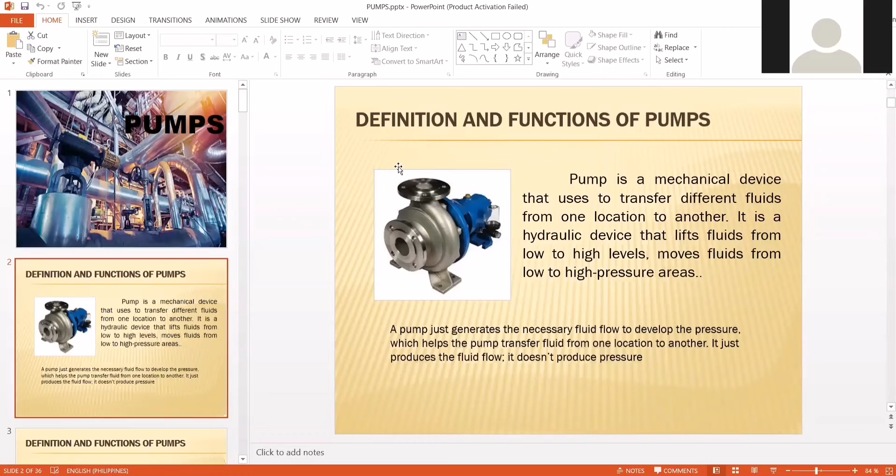It serves as a mediator to transfer fluid from a particular location to another location. It is self-explanatory. Pumps are mainly used for pumping water, slurries, food,

wastewater, oil, and gas. Pumps are also used for irrigation systems, power plants, wastewater treatment systems, chemical industries, food industries, fertilizer industries, and etc.

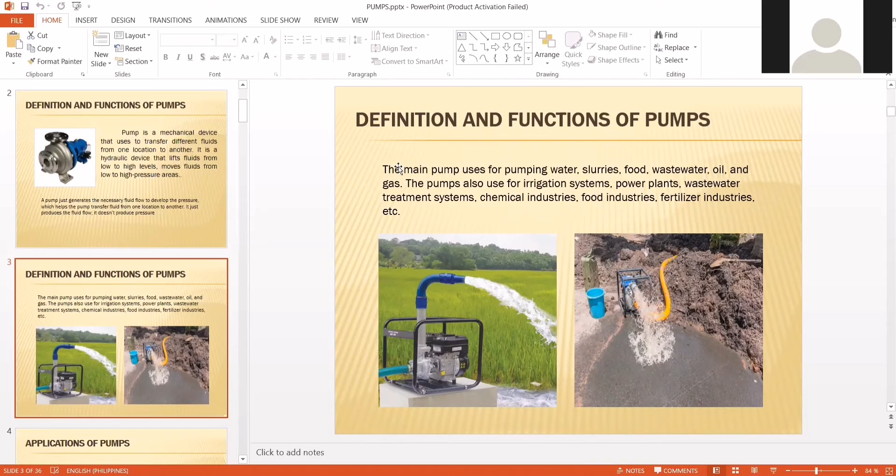Number one, pumps are used to transmit water from one place to another place. As I said earlier, you get a source of water from a lower level, so for the water to reach the upper level where you want to send it, you really need a pump.

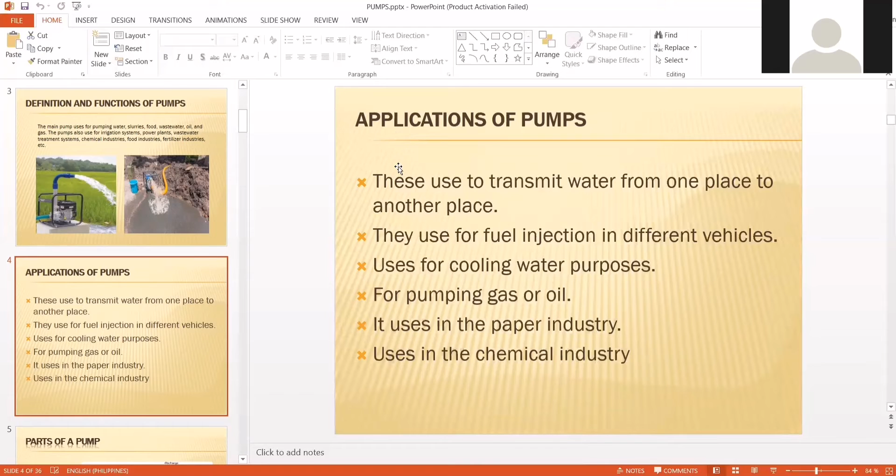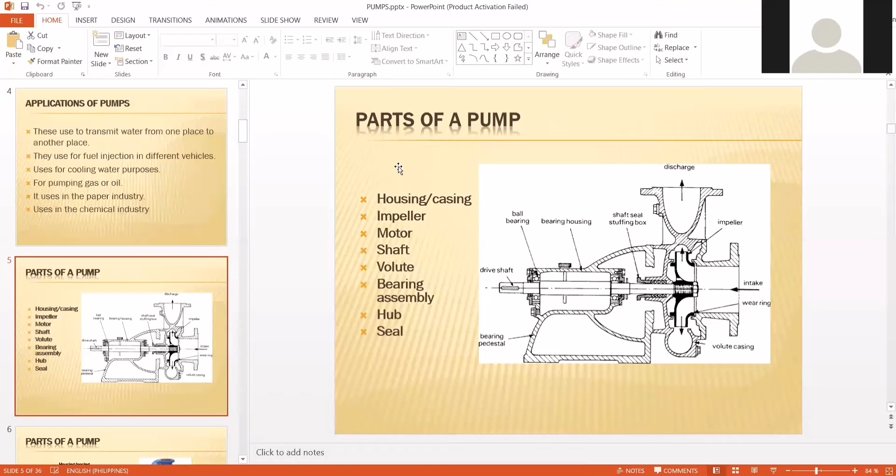So what are the parts of a pump? As you can see in the image provided, that is an example of a pump labeled with its different parts. We have housing or casing, the impeller, motor, the shaft or drive shaft, the volute, the bearing assembly, hub, and seal.

Housing or casing: the housing or casing is the outer shell of the pump that protects most of the components from outside elements. The casing of the pump should be made of materials suitable to withstand the environmental conditions of the application. For example, a submersible pump should be water and rust corrosion resistant. So obviously, the housing casing should survive in whatever environment you put it in.

Next is the impeller. It is a rotating disc with a set of vanes coupled to a shaft. When the impeller rotates, it imparts energy to the fluid to induce flow. Flow characteristics of the pump vary widely based on the impeller design.

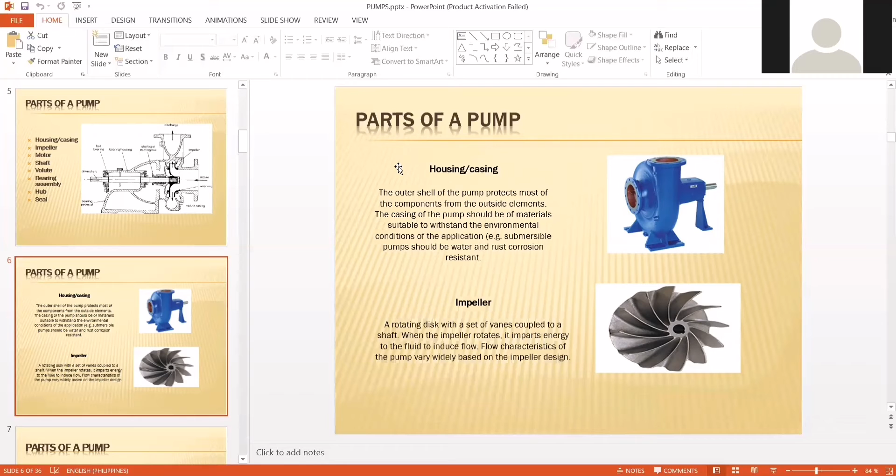Next is the motor. The motor is the power source of the pump, drives the shaft. AC alternating current motors and direct current motors are the most common power sources of pumps, but internal combustion engines (ICEs), hydraulic power, and steam power are other possibilities. Usually, the motor that powers the pump, the mediator, is an AC or DC motor, but for larger pumps, it's probably hydraulic power or steam power.

Next is the shaft. The shaft connects the impeller to the motor or engine that provides power for the pump. The shaft and its support arrangements must maintain alignment of the rotor within its running clearances and through the shaft seal.

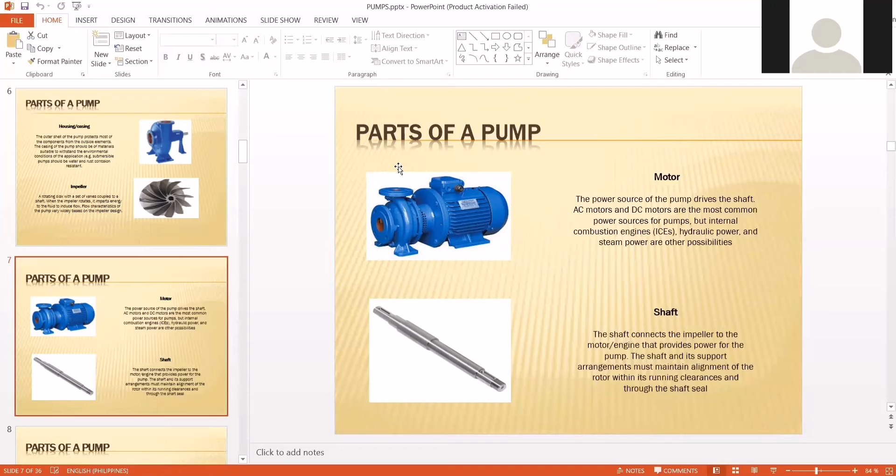Volute: the volute is the inner casing that contains the impeller and collects, discharges, and sometimes recirculates the fluid being pumped. The materials used to construct the lining of the pump volute must be compatible with the handled media.

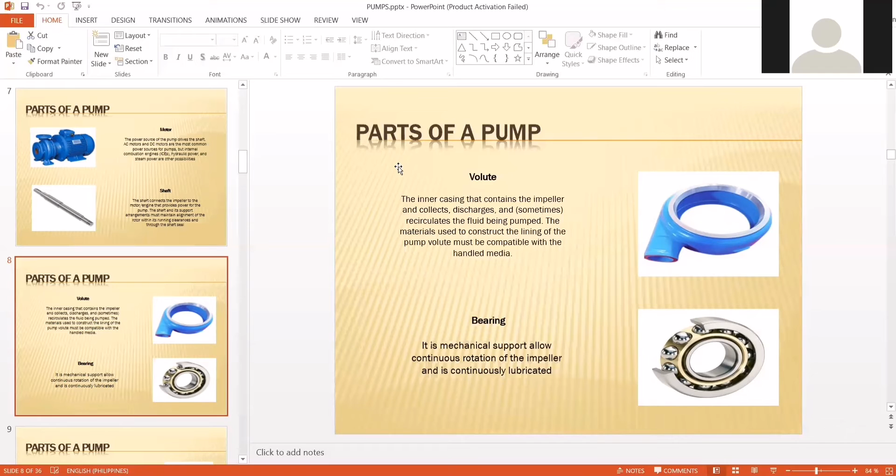Next is the hub. A hub is a device attached to the bearing assembly, which is the connecting point for the motor or engine. The seal protects the bearing from being contaminated by the pump media. Some pump designs are sealless, meaning the pumping mechanism is completely contained within a pressurized volute chamber with static seals. So you need seals to secure your pumps.

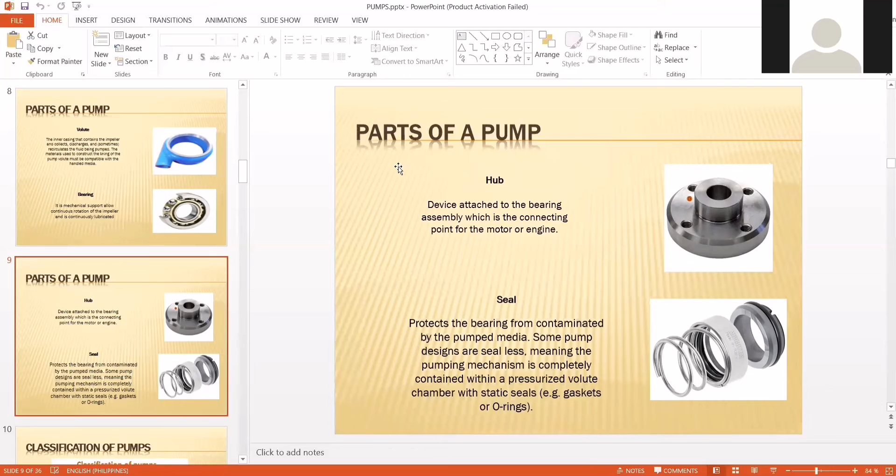Now we move on to the classification of pumps. There are two major types of classification. First is dynamic pumps. Dynamic pumps impart velocity and pressure to the fluid as it moves past or through the pump impeller, and subsequently convert some of that velocity into additional pressure. It is also called a kinetic pump. Kinetic pumps are subdivided into two major groups: centrifugal pumps and vertical pumps.

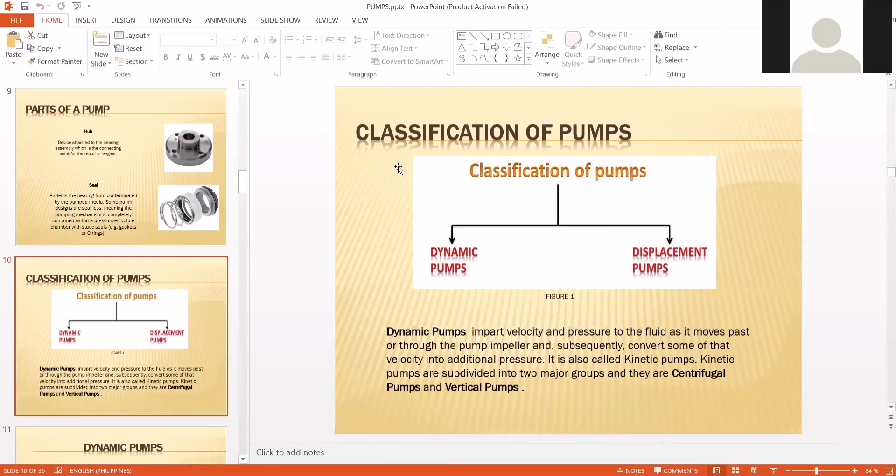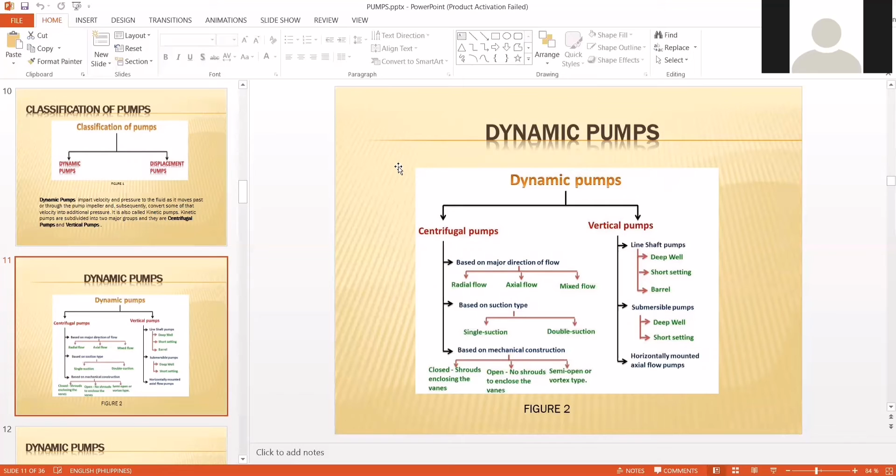This figure shows the different subtypes of dynamic pumps, so centrifugal pumps. What is a centrifugal pump? A centrifugal pump is a rotating machine in which flow and pressure are generated dynamically. The energy changes occur by virtue of two main parts of the pump: the impeller and the volute or casing.

So as we can see in the picture, the impeller and then the volute. The function of the casing is to collect the liquid discharged by the impeller and to convert some of the kinetic energy into pressure energy. So it's more that the movement of the water produces pressure, as if it's converted coming from the impeller.

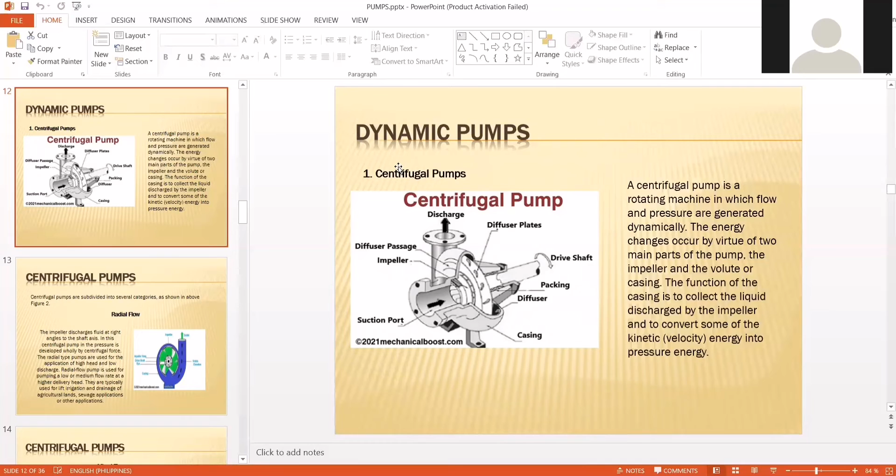Centrifugal pumps are subdivided into several categories. As we can see here in figure 2, we have three subtypes of centrifugal pumps. The first is the radial flow.

Radial flow is when the impeller discharges fluid at right angles to the shaft axis. In this centrifugal pump, the pressure is developed wholly by centrifugal force. The radial type pumps are used for applications of high head and low discharge, pumping a low or medium flow rate at a higher delivery head. They are typically used for lift, irrigation, and drainage of agricultural lands, sewage applications, or other applications.

So from the word centrifugal, radial means circular path. It also uses applications of high head and low discharge. So the mechanics of the radial flow pump is that the head is large when water enters the impeller, then there's high pressure, low discharge, meaning the pressure is strong. As shown here on the right side of the photo, the outlet is a bit smaller than the inlet at the suction. So that is the type of pump with high head and low discharge.

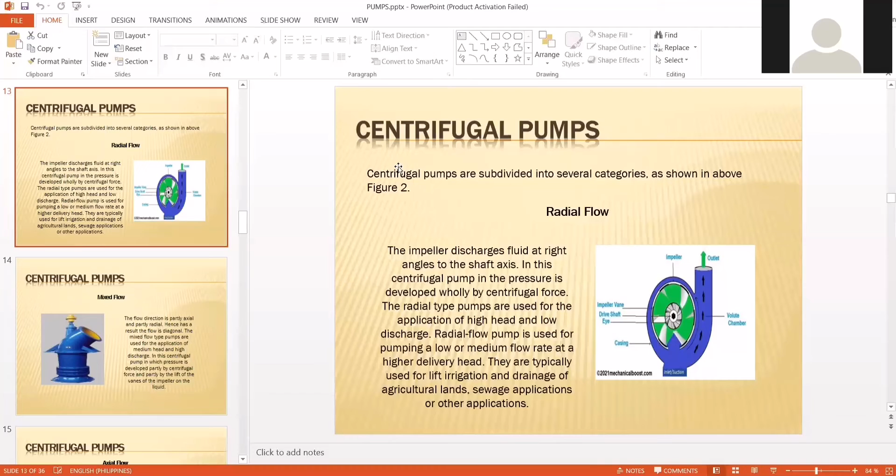Next is mixed flow. The mixed flow direction is partly axial and partly radial. That's why it's called mixed, because it mixes two types of flow. As a result, the flow is diagonal. The mixed flow type pumps are used for applications of medium head and high discharge. In this centrifugal pump, pressure is developed partly by centrifugal force and partly by the lift of the vanes of the impeller on the liquid.

So here it's both combined. There are two kinds of pressure being developed: one from the centrifugal force, and one from the vanes of the impeller.

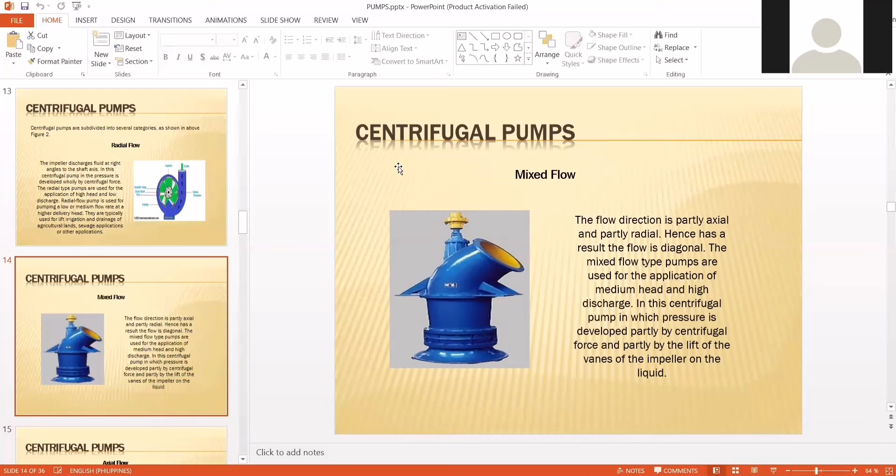So that's mixed flow. Next is the axial flow. Axial flow is when the flow through the impeller is parallel to the shaft axis, with low head and very high discharge. So it's the opposite of the radial flow. The axial flow type pumps are used for applications of low head and high discharge. In this centrifugal pump, the pressure is developed by the propelling or lifting action of the vanes of the impeller on the liquid.

So we have a series of nomenclature. Specific speed NS 500 to 5,000, and it should be greater than 1.5 — that is the radial flow pump. For a specific speed of 5,000 to 10,000, it should be less than 1.5 — that's for the mixed flow pump. For the axial flow pump, the specific speed is 10,000 to 15,000, and it should be equal to 1. So I guess this is the ratio.

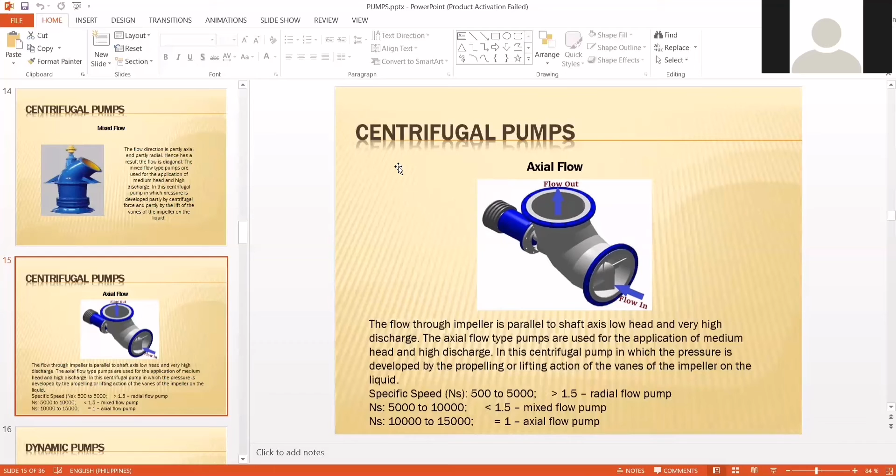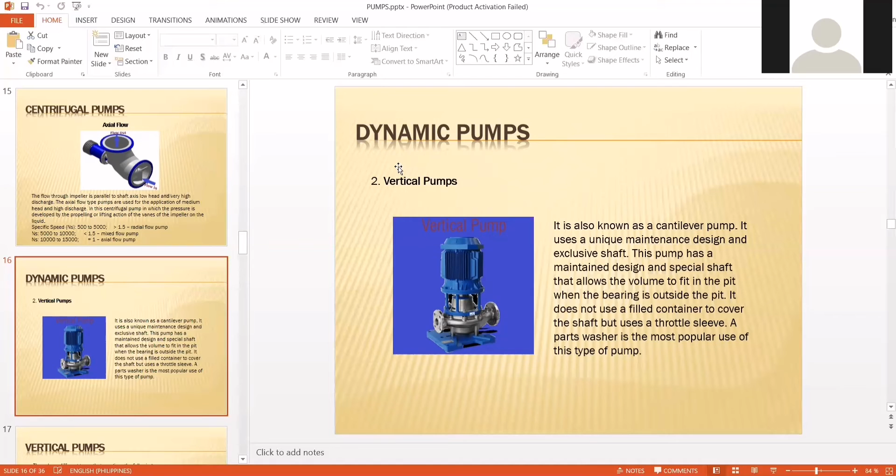Vertical pumps have different types. The first is the horizontal pump. The horizontal water pump has at least two impellers and is used for pumping service. All phases are in similar shelters and mounted on similar axes. At least 8 additional stages can be mounted on a single horizontal shaft, each lifting roughly the same amount of head. The multi-stage water pump can be primed, double or single suction with the first impeller. That is an example of a horizontal pump.

Next is the submersible pump. These are close-coupled pumps driven by submersible motors and designed to be installed underwater in damp wells. The motor mounts under the bowl assembly and directly connects to the rotor shaft of the pump.

A submersible pump is also known as a septic tank, sewage, and rainwater pump. It has many applications including construction, municipal, industrial, local, household, commercial, and stormwater recycling services.

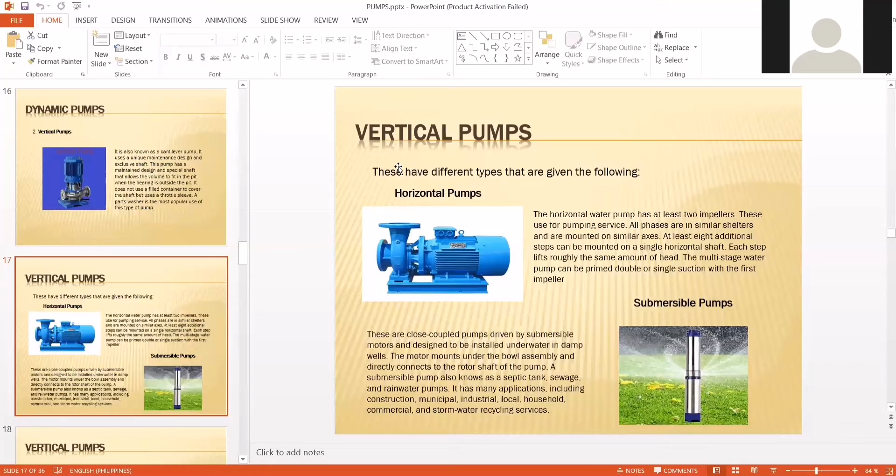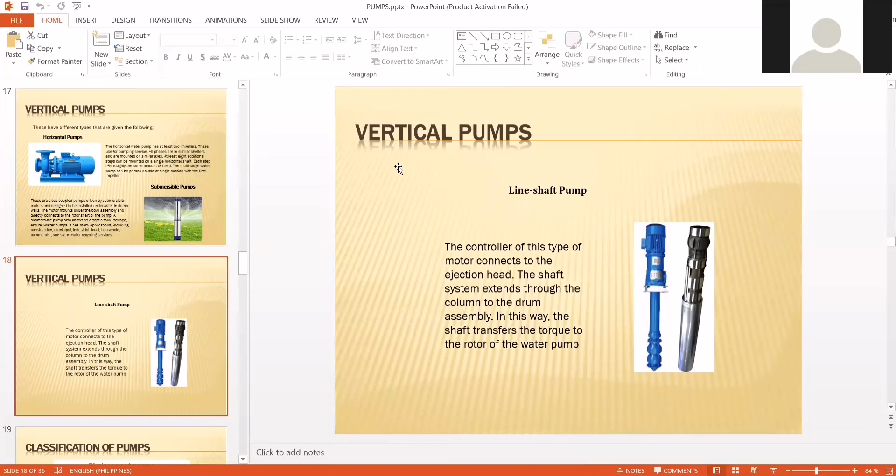Now I am going to hand over to our next reporter for the second type of classification of pump.

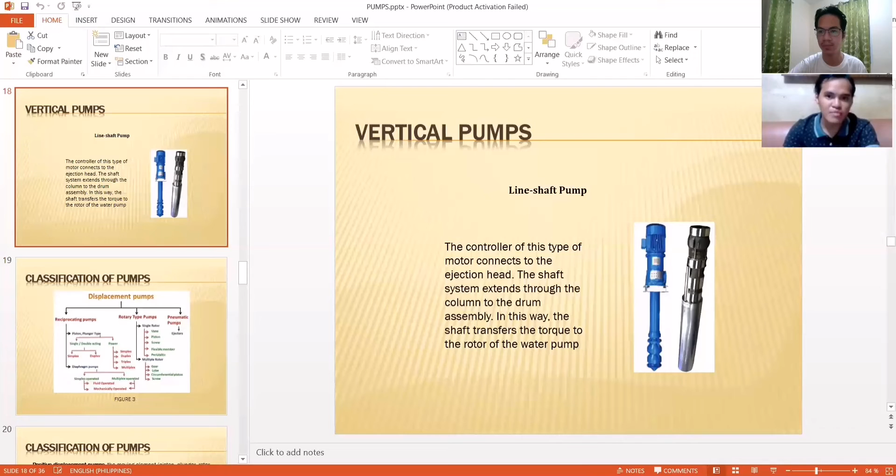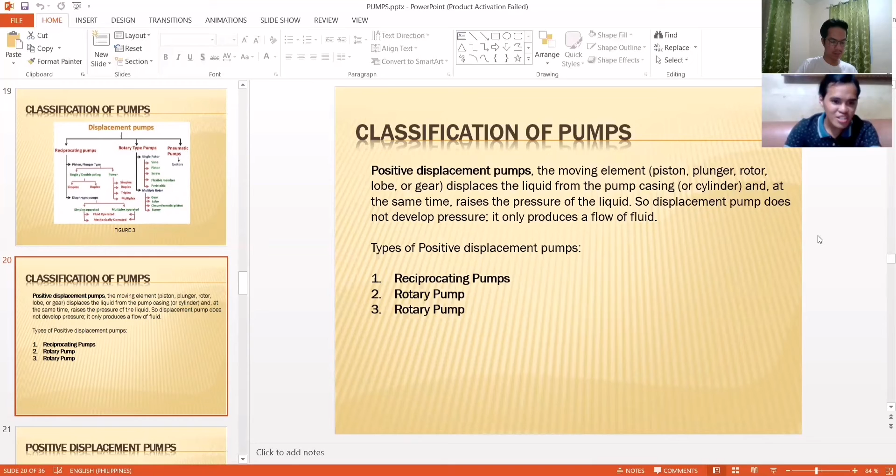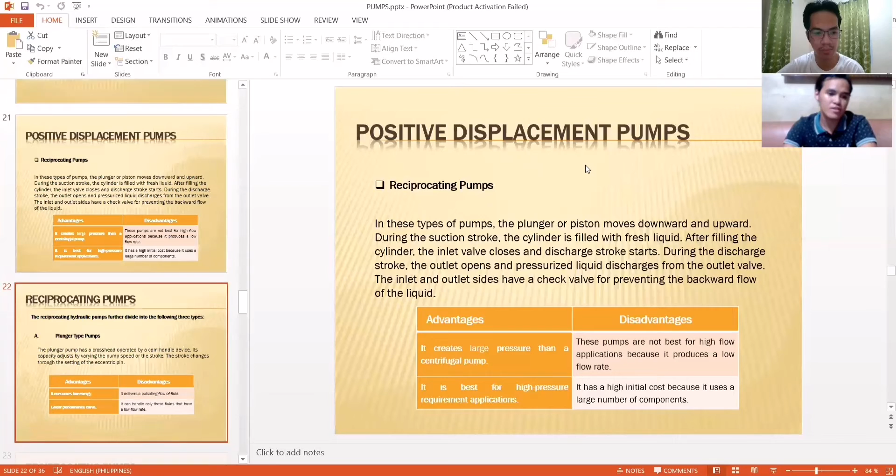Next slide. The reciprocating hydraulic pumps further divide into the following three types.

First is the plunger type pump. The plunger pump has a crosshead operated by a cam-handled device. Its capacity adjusts by varying the pump speed or the stroke. The stroke changes through the setting of the eccentric pin.

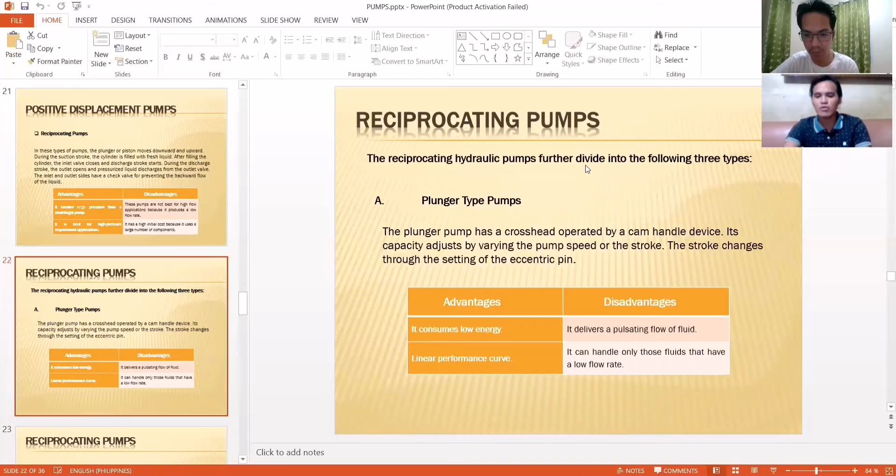The advantage of plunger type pumps is that it consumes low energy and has a linear performance curve. The disadvantage is that it delivers a pulsating flow of fluid, and it can handle only those fluids that have a low flow rate.

The second type of reciprocating pump is the diaphragm pump. This type of pump is versatile and can handle a large number of fluids, including dry food powders, wastewater, additives, pharmaceuticals, and chemicals. The advantage of diaphragm pumps is that it does not require any packing or seals, so it is used in applications that do not require leaking. It is designed for pumping slurries and liquids.

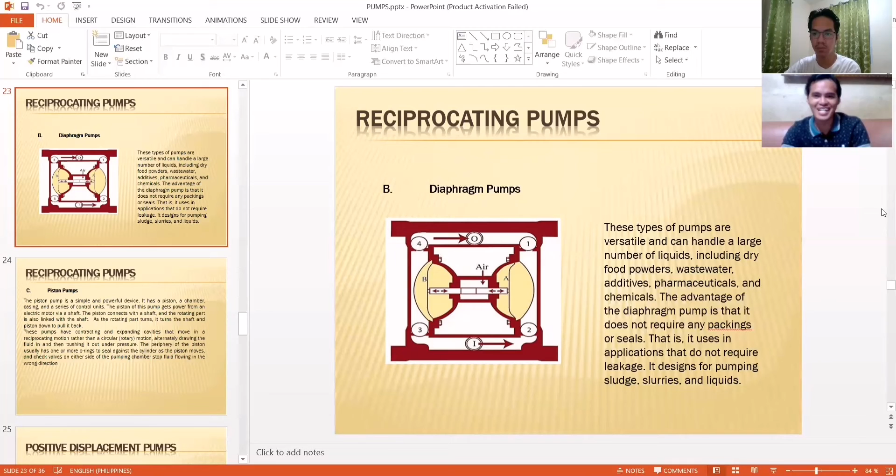Next is piston pumps. The piston pump is a simple and powerful device. It has a piston, a chamber, casing, and a series of control units.

The piston of this pump gets power from an electric motor via a shaft. The piston connects to the shaft, and the rotating part is also linked with the shaft. As the rotating part turns, it turns the shaft and the piston down to pull it back. These pumps have contracting and expanding cavities that move in a reciprocating motion rather than a circular or rotary motion.

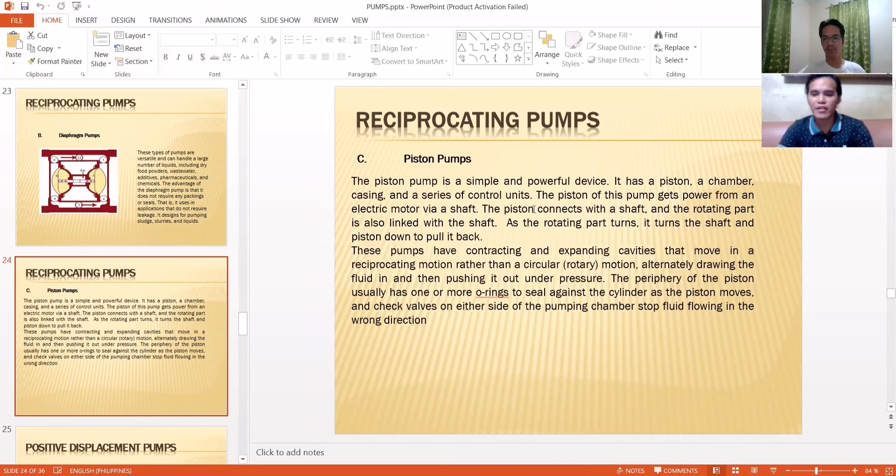Alternately, drawing the fluid in and then pushing it under pressure. The periphery of the piston usually has one or more O-rings to seal against the cylinder as the piston moves, and check valves on either side of the pumping chamber stop fluid flowing in the wrong directions.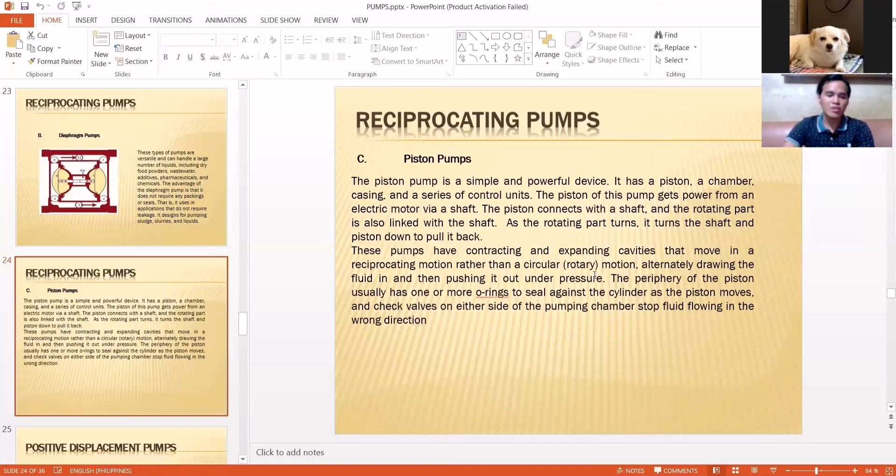These are self-priming pumps and offer an almost constant delivery rate, regardless of the pressure. They are manufactured with minimum clearance between the stationary and rotating components to minimize leakage from the pressure side to the suction side. These pumps work at low speed to sustain this clearance.

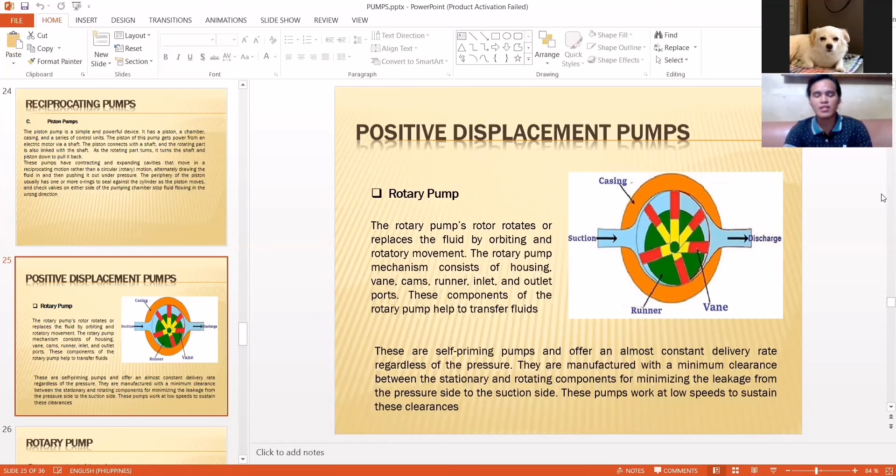The rotary pumps have the following further types. First is the rotary lobe. The rotor of this type of pump does not touch the housing during its working. The liquid sucks in from the suction valve to the cavity between the chamber wall and lobes. Due to the meshing of the rotors, the liquid can't escape between them. Therefore, liquid exits from the nozzle along the rotation direction of the outer lobe.

These have various characteristics, such as reliability, hygienic quality, rust resistance, and excellent efficiency.

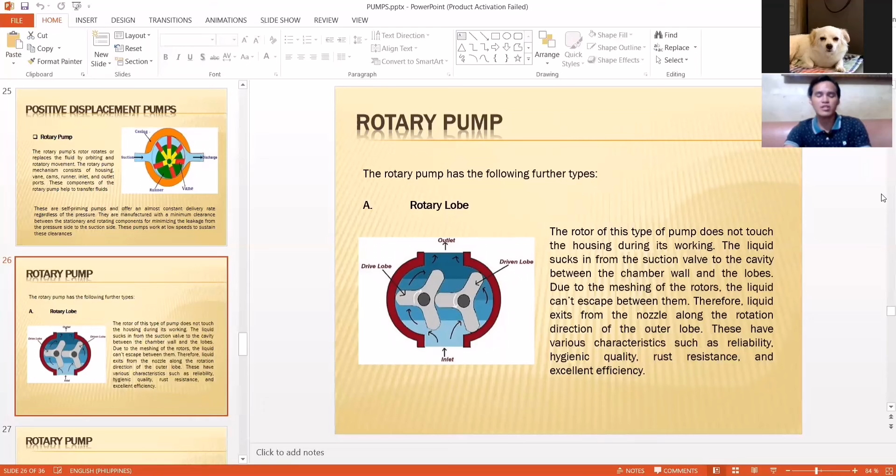Next type of rotary pump is screw pumps. It is a singular kind of positive displacement rotary pump in which the liquid flow through the pump elements is axial. It is a non-clog, large capacity atmospheric pressure device that can pump various waste and solids from the original raw sewage. However, these have practical limitations about pumping head. It uses two screws, driver and driven screw, for pressuring the fluid. These screws are meshed with each other.

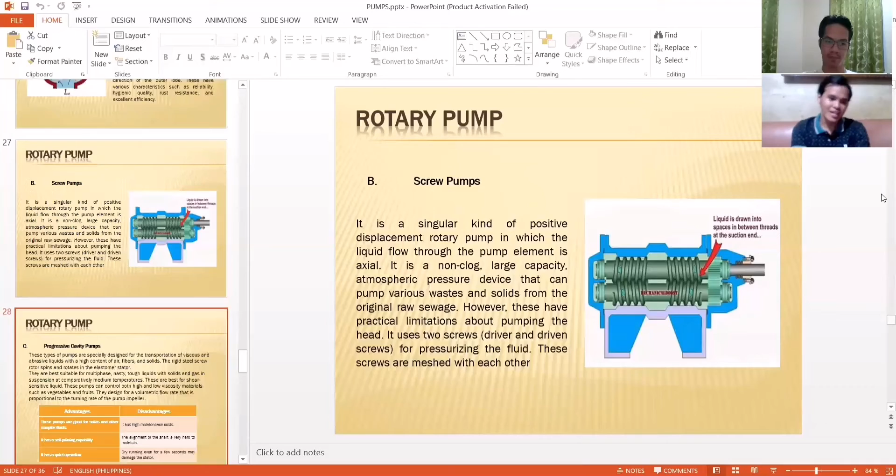Next type is progressive cavity pumps. These pumps are specially designed for the transportation of viscous and abrasive liquid with high content of air, fibers, and solids. The rigid steel screw rotor spins and rotates in an elastomer stator. They are best suitable for multi-phase, nasty, tough liquid with solid and gas in suspension at comparatively medium temperatures.

These are best for shear sensitive liquid. These pumps can control both high and low viscosity material such as vegetables and fruit. They are designed for a volumetric flow rate that is proportional to the turning rate of the pump impeller. The advantage of the progressive cavity pump is that it is good for solid and other complex fluid. It has a self-priming capability. It has a quiet operation.

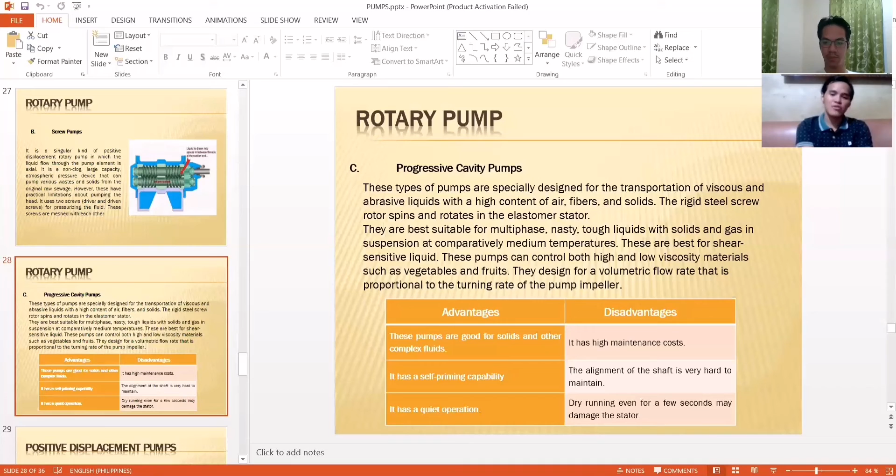And disadvantage of this is it has high maintenance cost. The alignment of the shaft is very hard to maintain, and dry running even a few seconds may damage the stator.

And the last positive displacement pump is pneumatic pump. A pneumatic pump is a positive displacement pump. They are used for applications such as water treatment, food, and chemical companies. This pump provides a stable flow for mixing and measuring, and it also has the capacity of pumping various liquids such as toothpaste or multiple chemicals. And these pumps use pressure air to move the fluid.

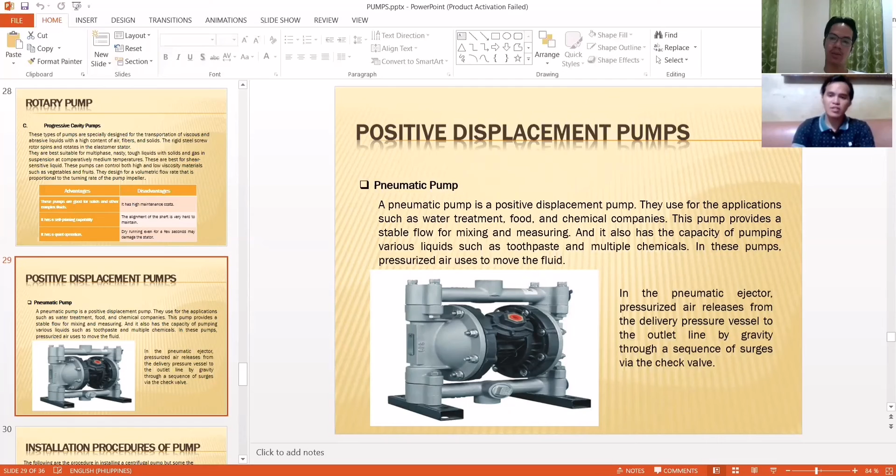In the pneumatic ejector, pressurized air is released from the delivery pressure vessel to the outlet line by gravity through a sequence of surges via check valves.

Next is the installation procedure of the pump. The following are the procedures for installing a centrifugal pump, but some of the procedures apply to other pumps too. First is foundation. The foundation of the centrifugal pump should be substantially hard enough to support the pump and rest of the installed industrial unit. Bolts for the foundation should be of the proper size and embedded into concrete. A pipe sleeve should be larger than the bolt, which would allow for final positioning of the bolts.

Next is mounting. The pump base must be leveled in such a way that the pump shaft is in vertical alignment. The pump suction as well as discharge flanges should be in vertical and horizontal planes respectively.

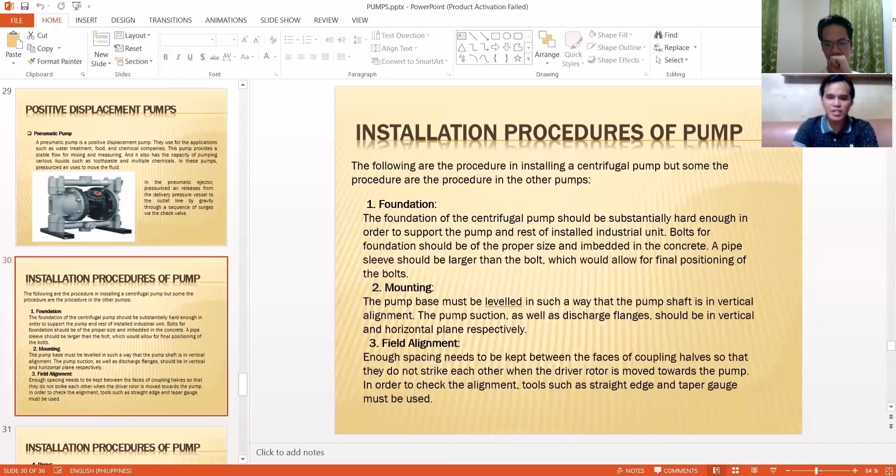And the third is field alignment. Enough spacing needs to be kept between the faces of the coupling halves so that they do not strike each other when the driver rotor is moved towards the pump. In order to check the alignment, tools such as a straight edge and taper gauge must be used.

And number 4 is piping. The suction and discharge pipes should be supported independently with the help of pipe hangers and support blocks. This will prevent strain on the centrifugal pump joint and casing. The pipe alignment needs to be checked before the connection is made. The piping practices should be as per the manual or SOP of the centrifugal pump, as it may directly affect the efficiency and power consumption of your pump.

Next is wiring. The centrifugal pump wiring needs to be adequate size to prevent voltage drop. It should be noted not to start the centrifugal pump until it is filled with liquid. Rotation: the rotation of the centrifugal pump is indicated on the pump casing. The correct rotation needs to be established before assembling the coupling and base mounted units.

Number 7, ground motor. Connect the ground wire to the approved ground and then connect to the provided terminal.

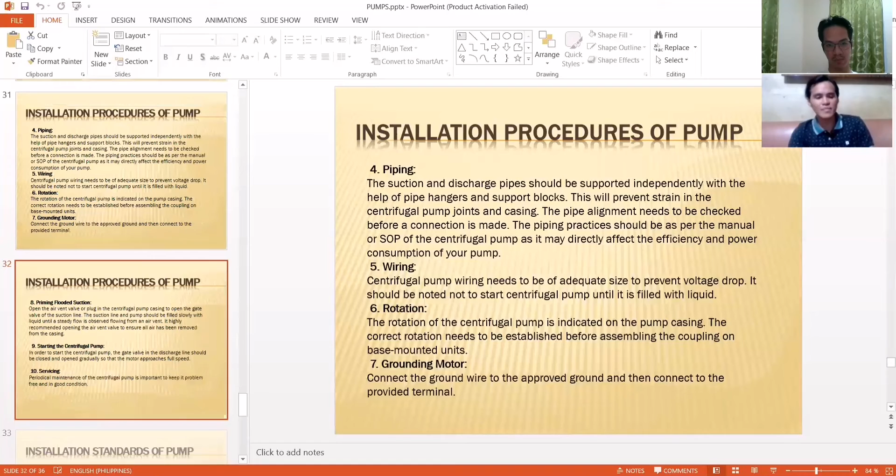Number 8, priming flooded suction. Open the air vent valve, or plug in the centrifugal pump casing, then open the gate valve of the suction line. The suction line and the pump should be filled slowly with liquid until a steady flow is observed flowing from the air vent. It is highly recommended to open the air vent valve to ensure all air has been removed from the casing.

Second to last is starting the centrifugal pump. In order to start it, the gate valve in the discharge line should be closed and then opened gradually so that the motor approaches full speed.

Last is servicing. Periodical maintenance of the centrifugal pump is important to keep it problem-free and in good condition.

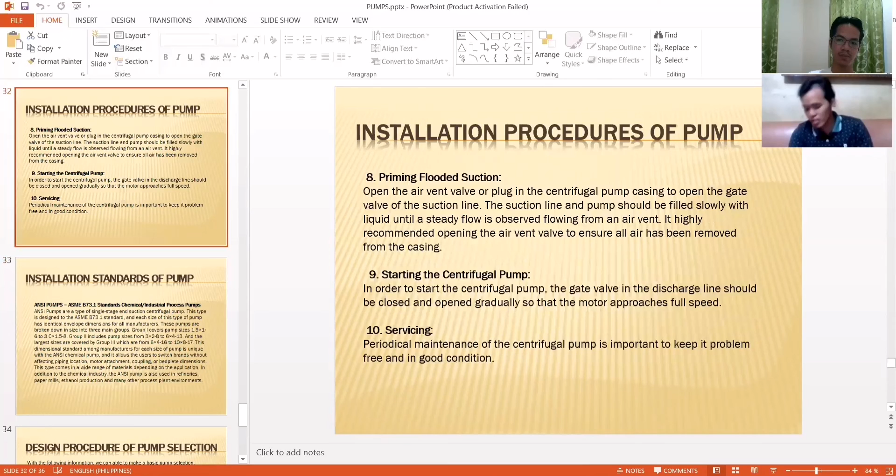Then the installation procedure, the installation standard of the pump. ANSI pump, the American... ASME B73.1 standard for chemical or industrial process pumps.

ANSI pumps are a type of single stage end suction centrifugal pump. This type is designed to the ASME B73.1 standard, and each size of this type of pump has identical envelope dimensions across all manufacturers.

These pumps are broken down in size into 3 main groups. Group 1 covers pump sizes 1.5 by 1 to 6, to 3.0 by 1.5 to 8. Group 2 includes pump sizes 3 by 2 to 8, to 6 by 4 to 13. And the largest sizes are covered by Group 3, which range from 6 by 4 to 16, to 10 by 8 to 17.

These dimensional standards among manufacturers for each size of pump are unique to the ANSI chemical pump, and it allows users to switch brands without affecting piping location, motor attachment, coupling, and bed plate dimensions.

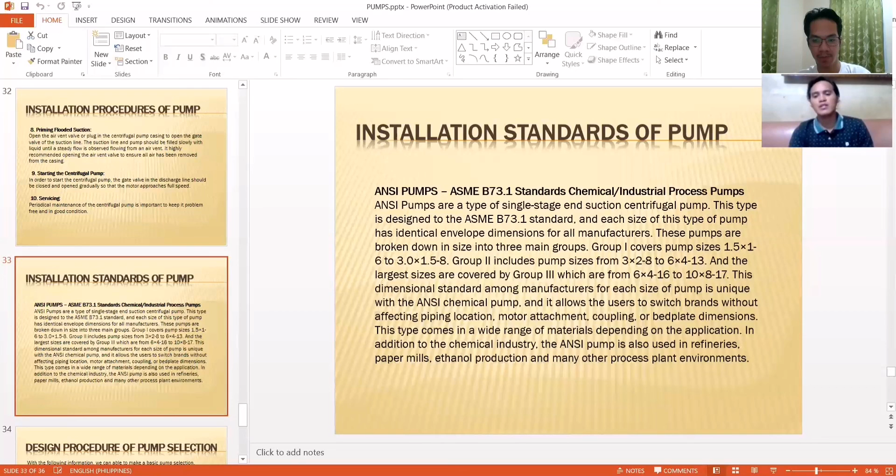Then the design procedure of pump selection. With the following information, we are able to make a basic pump selection. First is the liquid name. Knowing the liquid that you are pumping is vital as it allows us to ensure that we offer pump construction from compatible materials, thus avoiding potential corrosion and abrasion issues.

What is the chemical makeup? Are there any solids present? If so, what is the maximum particle size and concentration? These are questions that may be asked when determining the liquid name. Next is flow rate.

This will determine the size of pump required. A higher flow rate requires a larger pump.

Pressure: the pressure at the inlet and outlet of the pump will determine the type and often the size of pump required. Knowing the pressure you are pumping against allows us to select the most suitable pump technology. If you are unsure of your differential pressure, we can help calculate it.

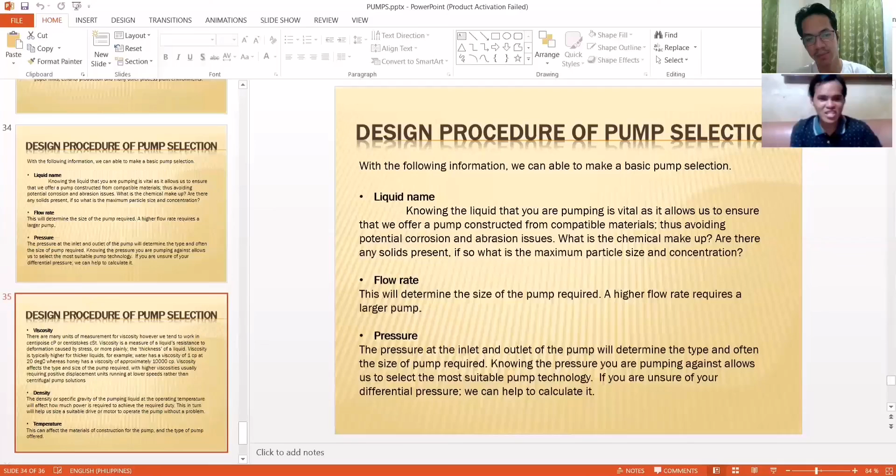Next is viscosity. There are many units of measurement for viscosity, however we tend to work in centipoise (cP) or centistokes (cST). Viscosity is a measure of a liquid's resistance to deformation caused by stress, or more plainly, the thickness of a liquid. Viscosity is typically higher for thicker liquids. For example, water has a viscosity of 1 cP at 20 degrees Celsius, whereas honey has a viscosity of approximately 10,000 cP. Viscosity affects the type and size of pump required.

High viscosity liquids usually require a positive displacement unit running at low speed, rather than a centrifugal pump solution.

Density: the density or specific gravity of the pumping liquid at operating temperature will affect how much power is required to achieve the required duty. This in turn will help us size a suitable drive or motor to operate the pump without problems.

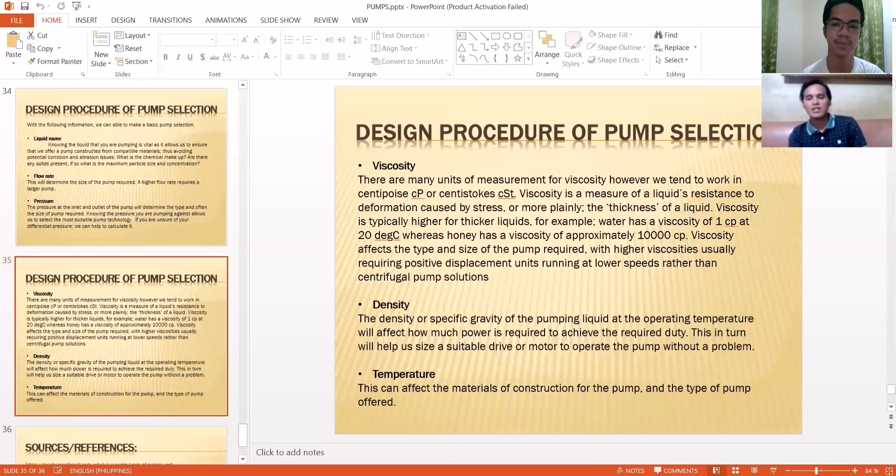Last is temperature. This can affect the material of construction for the pump and the type of pump offered. Last slide is the source references. Now, thank you.